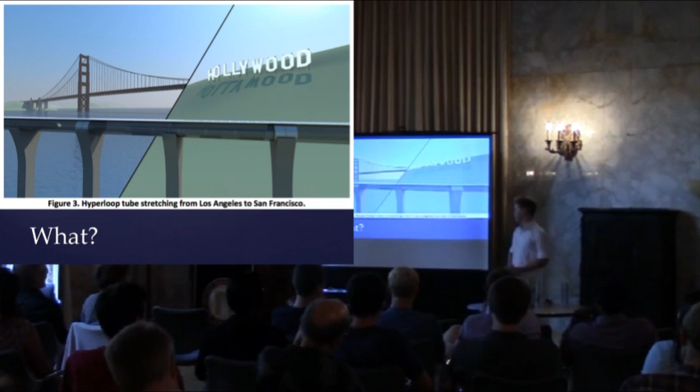Scientists have looked at it, and they haven't found any major problems with it, although it's been out for a few months now. However, it hasn't actually been prototyped at any scale. So I figured, this is what I should do in order to graduate. Okay, but what is it?

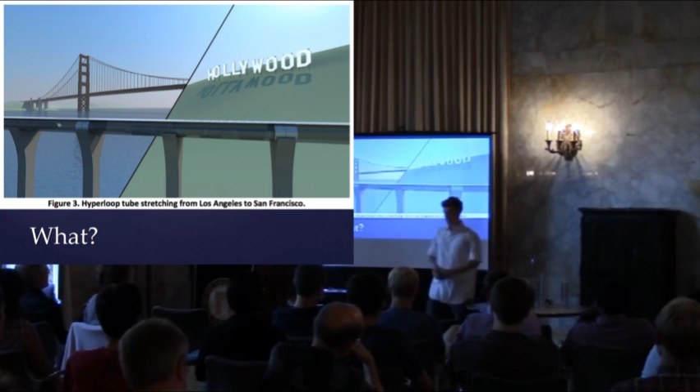In order to move very quickly, you have to be in a special environment, specifically an evacuated tube. Evacuated doesn't mean vacuum, that's very hard to do, but just low pressure, about 1/10,000th of atmospheric pressure, which is actually quite reasonable given industrial scale vacuum pumps. So you have 2 of these tubes traveling back and forth that have low pressure. Low pressure means low air resistance, and you can travel quickly and efficiently.

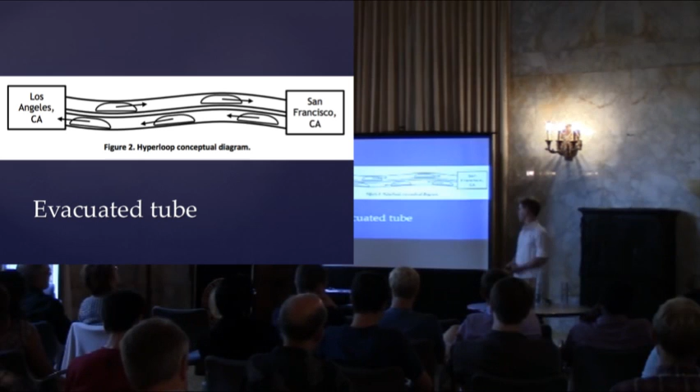One of the interesting things is that those lozenge-shaped capsules don't actually power themselves. They coast almost all the way, which is quite unusual for a form of transportation. So they're going to be coasting at between 300 and 700 miles per hour. How did they get going that fast in the first place? Well, you use what's called a linear induction motor, or that's what Elon Musk proposes. I expanded the definition to be any form of electromagnetic launch.

It seems kind of arcane, but you've probably experienced this if you've ever been on an industrial-grade minecart or on a roller coaster. The same kind of technology propels them. And these have been proven to work at the high energies required for the Hyperloop. So, this thing accelerates you, you go winging along, you're moving fine. What keeps you from crashing into the bottom?

Elon Musk points out in his white paper, wheels don't work at that kind of speed. They simply evaporate, burn up, and are very inefficient. So how do you keep yourself from impacting the bottom? He suggests something called an air bearing. Basically, you take 2 sheets of material with a very, very thin gap between them, and you pump high-pressure air in that gap. That creates an extremely slippery and remarkably stiff film of air that allows you to coast at very, very

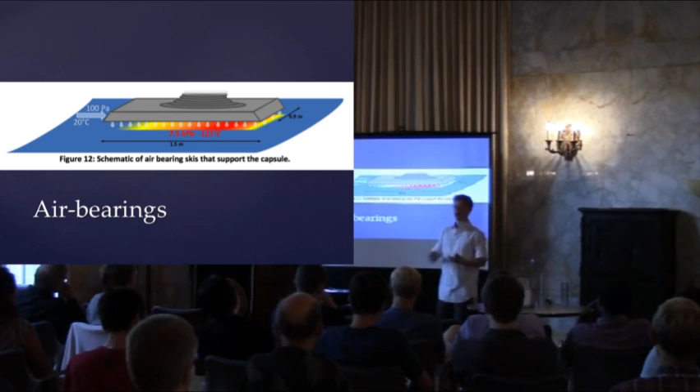high speeds. Again, it seems like a strange technology, but you've experienced this if you've played on an air hockey table. Flat sheet of plastic, a lot of small holes releasing a small amount of air. When your puck goes over it, it traps some of that air and creates a little film under it. Same principle that makes hovercrafts work. So here we are, moving very fast on a slippery sheet of air. Seems all well and dandy. But then you encounter the Kantrowitz limit, which we all know and love.

Right. You can think of it as the syringe effect. If you close off the end of the syringe and you try to move it really fast, you're going to encounter a lot of problems. Even if you evacuated a 350-mile-long tube to 1/10,000th of atmospheric pressure, and you're trying to wing a capsule through it at high speeds, and there's a very small gap between the outside of the capsule and the inside of the tube, you're going to end up building up a huge amount of pressure in front of you, and that's going to slow you down. It's going to be very inefficient.

So, one of Elon Musk's strategies was to basically drill a hole in the head of the syringe, allow some of the air in front of the capsule to actually pass through to the back and reduce that high pressure bubble in front of you. That allows you to go fast.

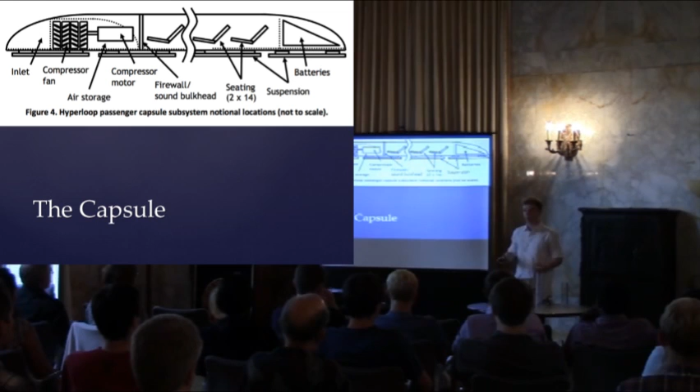So what does our capsule end up looking like? You end up having a large electric motor powering a compressor. The compressor takes air into the front, spits it out the bottom for air bearings, and out the back to overcome the Kantrowitz limit. Elon Musk proposes having several of these capsules traveling maybe every 2 minutes or so that carry about, 2 times 14 is 28 people. It'd be about 100 feet long, similar to an airplane, and you'd be in a nice reclining position. I don't think any beverages would be served.

So it seems like this is efficient and it's very fast. It's actually quite a good deal when it comes to transportation. But it's more than just a technical reason why. It's not just about saving money and energy. It's about the kind of technical prowess that we expect from California. And Elon Musk actually spells this out very clearly in his white paper.

He says, when the California high-speed rail was approved, he actually puts the quotes in there, so you can tell, I was quite disappointed, as I know many others were as well. How could it be that the home of Silicon Valley and JPL, doing incredible things like indexing all the world's knowledge and putting rovers on Mars, would build a bullet train that's one of the most expensive per mile and one of the slowest in the world? That's the current proposal for high-speed rail.

Costs about $68 billion. Will get you the same distance in about 2 hours for a ticket that costs over $100. The Hyperloop gets you there in 35 minutes. The ticket cost would be about $20, and it only costs $6 to $10 billion to create. People look at that number and say, oh, well, all major projects end up going over budget. If he goes over budget by twofold, he'll still come in $50 billion under high-speed rail.

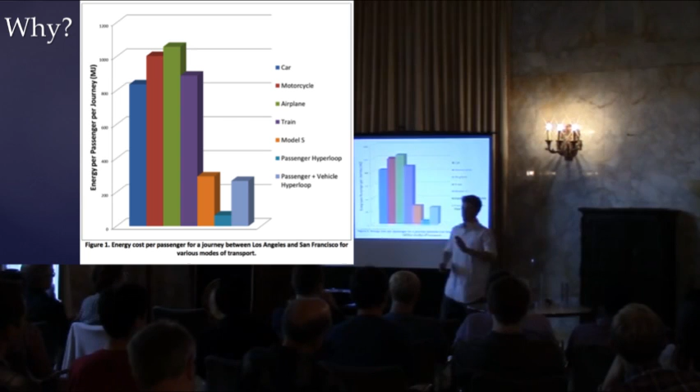So, we figured out why we want to do this. Now we get to the big question. How? It's not as easy as it seems. So let's go through the 4 things that make a Hyperloop a Hyperloop. An evacuated tube to travel in, electromagnetic launch to get you going, air bearings to keep you going, and our friendly Kantrowitz limit.

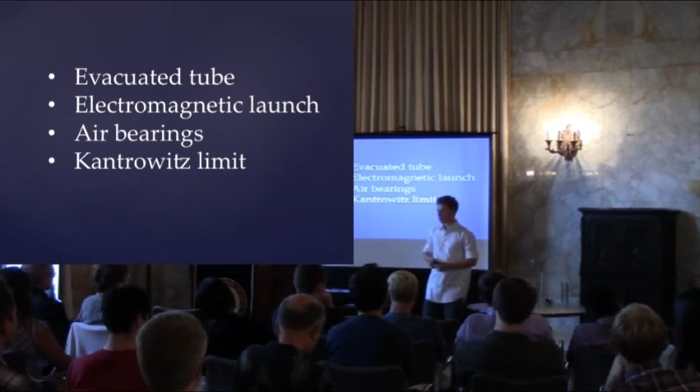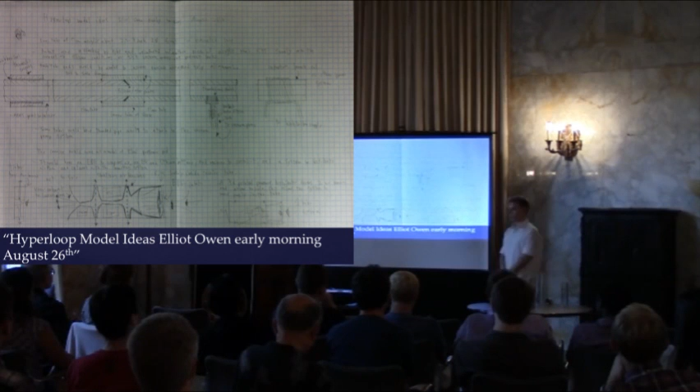So the first thing we come to is an evacuated tube. How do you get that kind of system? Well, Elliot at 2 a.m. thought it'd be great to have acrylic tubes. Acrylic's a type of plastic that's see-through, so you actually see the capsule moving. That'd be nice, looks more impressive. And you have little sleeves connecting them. So basically you have 2 tubes end-to-end with a sleeve over it, and that'll somehow create a seal. Didn't have that worked out at that point.

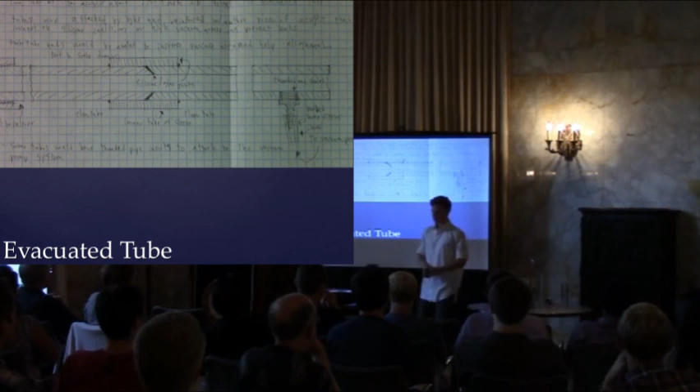I'm going to evacuate it by attaching a hose barb. It'll connect to a pipe. It'll connect to Mr. Ruzin's vacuum pump. Seemed like a great deal. I'd just be done. Well, I went through some evolutions. I realized I'd have to be able to take it apart and reassemble it and put it in my car. So it had to be modular, which means it could come in chunks, like Lego.

So I ended up with this system of alternating permanent and temporary connections. You have a small tube, permanently connected to a sleeve, that's then temporarily connected to the end of the next tube. So with that kind of premise, I could easily make this arbitrarily long, without much difficulty, and still fit it in my car. Also, I moved the nozzle to the end, and it ended up being much more convenient than drilling into a smooth piece of acrylic.

This is one of the first tests that I actually did. Here's Mr. Ruzin's vacuum pump, and here is a 6-foot length of acrylic. It's about 2 3/4 inches in diameter. The most important part of this picture are those 3 white rings you see on either end. Those are single strips of Teflon tape. It's a very thin and slippery material commonly used to seal threads in your plumbing or in the robotics pneumatics. So that actually creates enough of a seal and stops it from leaking too badly.

But with this setup, I can only get down to about 1/6 of an atmosphere, or 1/10 on a good day, which is still a few orders of magnitude off from where I want to be, or at least where Elon Musk told me I should be. So, enter the FGVP. I found a friend, Mr. Lunday, who works in automation, so he works with vacuums frequently, and he loaned me the FGVP, which is the fancy German vacuum pump.

So with the fancy German vacuum pump, I could actually reach higher pressures, or rather lower pressures, and go down to about 1/15 of atmospheric pressure. I connected the 2 because it ended up being kind of slow, and I could use Mr. Ruzin's faster one to just get there faster. But this wasn't quite easy. There were a lot of struggles along the way.

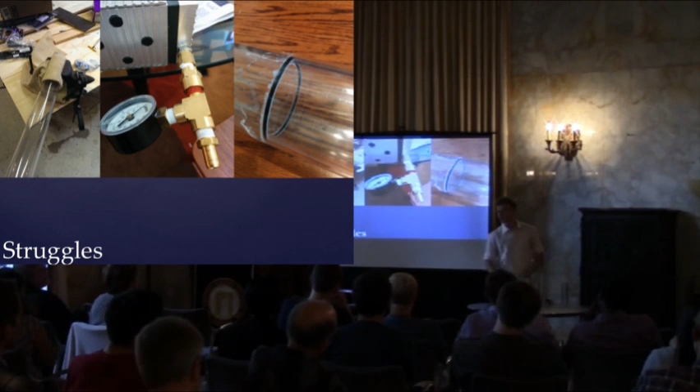At one point, I thought I could probably ditch the Teflon tape for a better solution. This is an O-ring rubber that managed to fit perfectly in between the two tubes. However, when TAP Plastics cuts your tubes for you, they don't do it perfectly perpendicular, it's at an angle. If you try to seal something at an angle, it's just going to leak all over the place. So it ended up not working, and I stuck to the Teflon. In the end, after much difficulty, I had an 18.5 foot long tube that was entirely connected and I could depressurize. So, that took a while to get to.

And then we get to electromagnetic launch. At this point, at like 3 a.m., I was totally on fire.

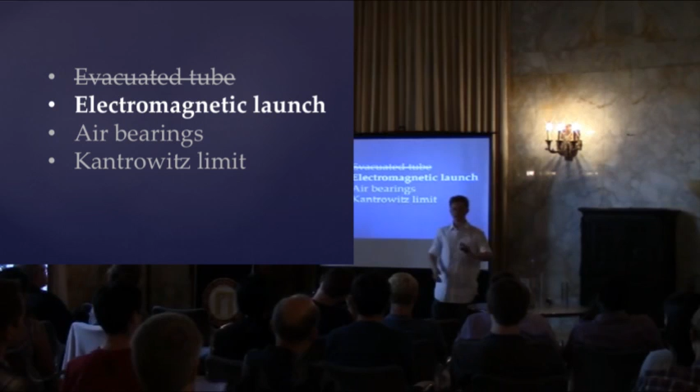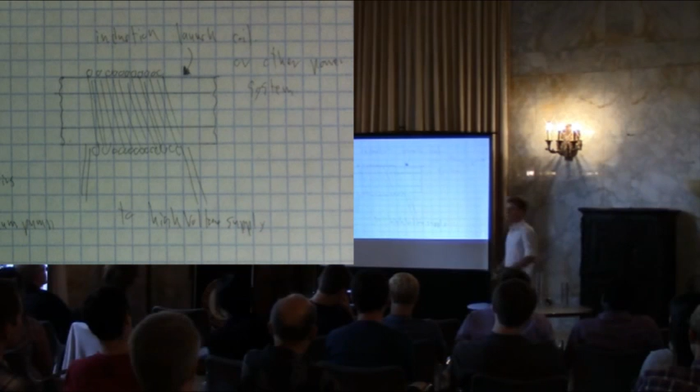I had all these great ideas. I was going to use a coil, right? It kind of works like that. I had no idea what was going on. So I ended up doing some more research, and I found that what I was really talking about was an induction coil gun. So, here you see a nice picture prepared by someone else.

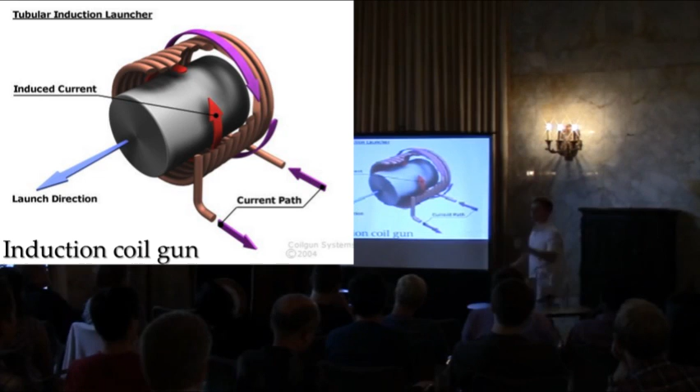You have a coil of copper wire, and you run alternating current through it. That current induces a current in the projectile. Induces is a word that physicists say when they really mean magically creates. So, that current magically creates another one, and naturally the projectile goes winging out that way. It seemed really easy. Obviously, this is bulletproof. Turns out, I ended up with a fail gun.

Not a fail gun. So, there was my coil, 10 wraps of 10 gauge wire. It looks kind of similar to what they had. I put a piece of aluminum projectile in it, plugged it into the wall, and the lights went off. Actually I blew a breaker, a 15 amp fuse on the back of the house. So I had to go out, reset that, much to my chagrin. And eventually I realized, okay, this is just going to keep happening.

So I bought a giant resistor. And that giant resistor is actually like 15 inches long. You work with resistors, they're normally tiny. That limits the current to about 8 amps. Plug that into the wall, no lights turned off, but the thing didn't move. And the resistor started getting very, very hot. It turned out it's also a heater.

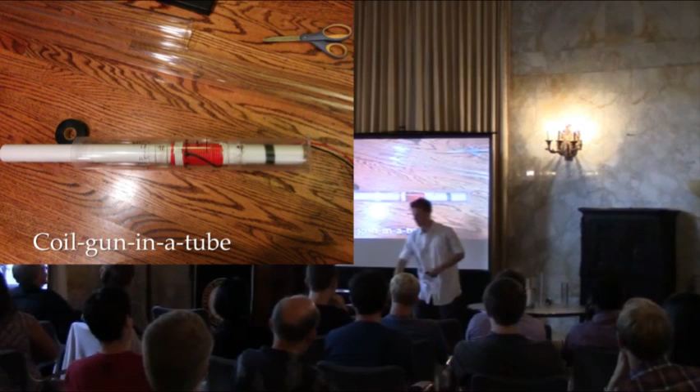But again, there were a lot of difficulties. I had to center the coil gun. This thing actually shoots an aluminum ring into the back of the capsule. When I told Dr. Character, he said Rube Goldberg wanted his ideas back. So it is kind of strange. I have it centered with these little acrylic spacers, but when you move the projectile another inch away from the coil, the power goes way down. So I ended up moving that.

I also had to get the wires out of the back of the tube while maintaining a vacuum. That required a lot of improvisation and silicone sealant, but I eventually got that to work.

And then here's a wasp. No, I did not make it. I encountered it though late at night after I was testing the coil. So 10:30, plug it to the wall, break another breaker, or rather just flip it. Go to the back of the house, back of the garage, take off the panel, and there's a wasp nest there. So this is not what I signed up for when I went to be doing science. So vegetarians, cover your ears. I did have to kill the wasp for science. So, sorry about that.

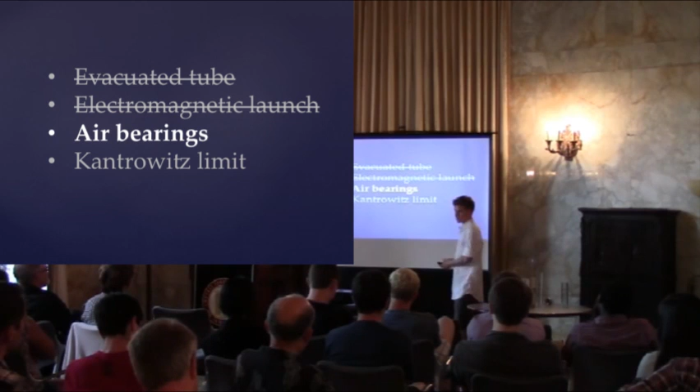And then there are the problems with air bearings, of actually making these things. I did some research. On the industrial scale, air bearings are made with micron tolerances. Extremely small distances, very high level of craftsmanship, stuff I didn't really have access to. So I had to figure that out. My first design was pretty cool. It was like crazy 3D printed internal structure to move the air around properly. Here's the fan, it spits out the side and the back, it's gonna be great.

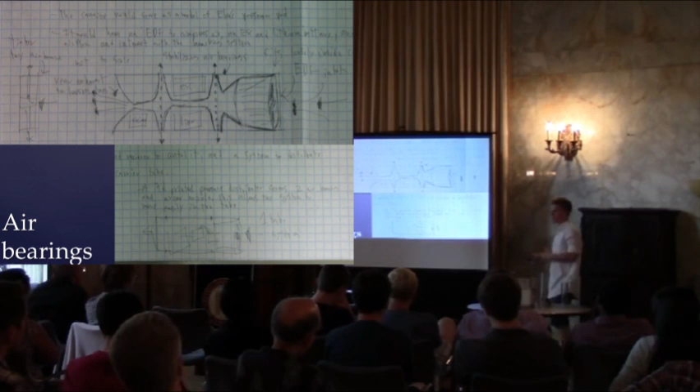Then I realized that if the entire capsule is going to be at the same kind of pressure, I can just drill holes in the outside and get the same exact effect without any fancy 3D printing. So here's my less enthusiastic one-tube system down here, where I just put the stuff in a tube and let it go.

Finding that tube was actually a real challenge. So here you see a motor connected to a controller. There's a big lithium battery on the back and a little throttle here. So it turns out that the inside of my Hyperloop is 2.5 inches. So I had a tube where the outside diameter was 2.5 inches.

And I thought, wow, gee, this is great. And they don't fit together. So that's also probably because acrylic has terrible tolerances. So then I thought, okay, I can get around that. So I want to size down. This is 2.25 inch, and it fits wonderfully.

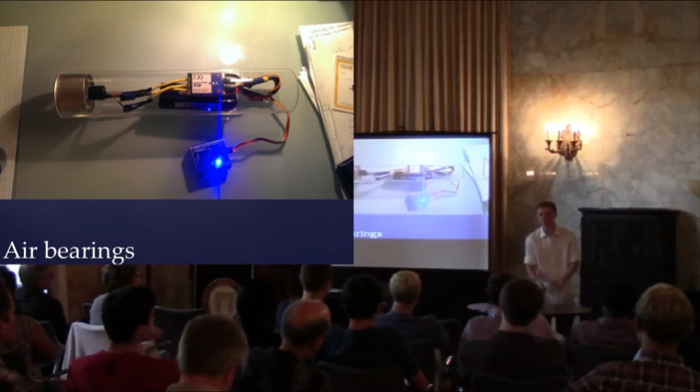However, my motor does not fit into it. So here I had a problem. One tube was too big, one tube was too small. I ended up searching online and found my Goldilocks tube, which was just right. So I then proceeded to drill a lot of small holes in it to allow the air to leak out the sides.

One thing that I realized in this demonstration is that when you have this big difference, there's a huge gap on top. If I simply had my holes and none of those two little white rings I'll talk to you about in a second, all the air would leak out the top, and it wouldn't form any pressure on the bottom, and it wouldn't actually separate off from the bottom of the tube.

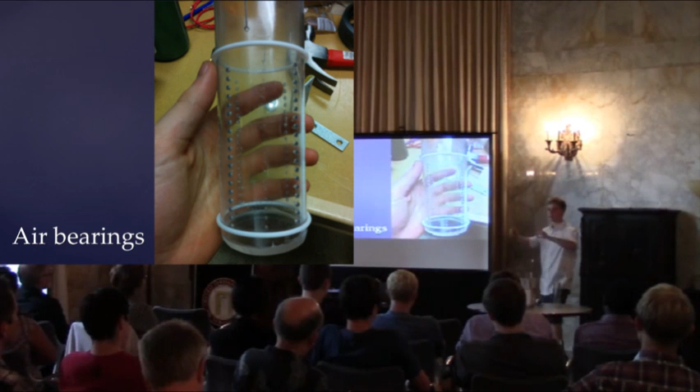So these are Teflon O-rings. It's a very slippery plastic, but more important, it's the right size to center the capsule, so that air is actually squeezed around these tiny little gaps, shown right here, instead of just pushed out randomly. So in my great idea, the air comes in, it gets squeezed out the sides, small holes, and spits out over the back, and that should make air bearings.

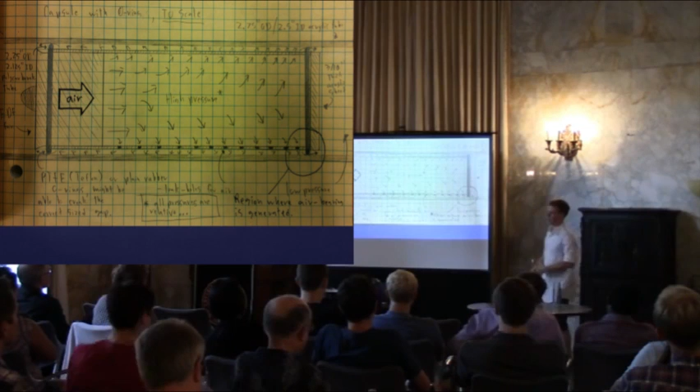Worked for a while until I ran into some more tolerance problems. It turns out that the acrylic tubes that I bought about 2 months later were smaller on the inside than the ones I bought a few months earlier. So the Teflon O-rings do not actually work anymore, so I had to go to plan B.

This is 3 layers of polyethylene tape with 1 layer of Teflon tape on the outside. Just 3 layers, not 4, 5 is right out. 3 layers is what you want. And that ended up working with a little bit smaller. Even that wasn't particularly easy. I had to drill a lot of small holes.

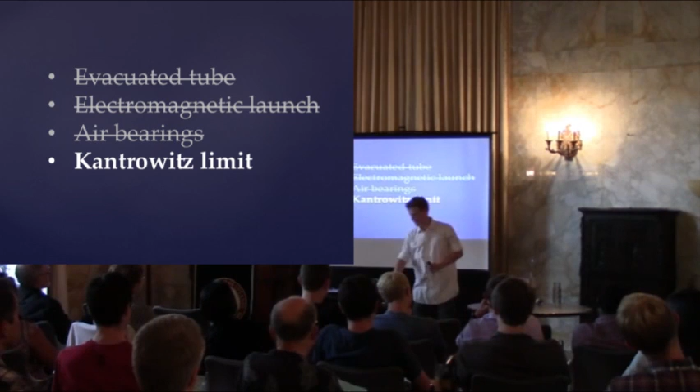What you may have noticed is that the capsule started moving before it was hit by the coil gun, and then continued to accelerate. That's because on a good day, the coil gun might deliver 1 joule of energy, and the motor will deliver 150 every second. So at this scale, the compressor fan can definitely power it, although it wouldn't actually work if you're trying to do it at a large scale.

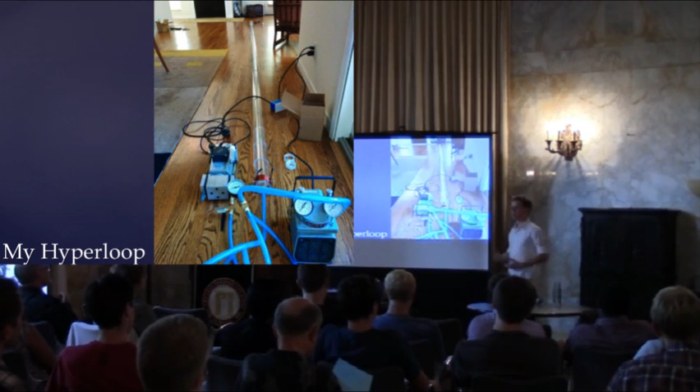But you know, what kind of stuff does apply? The lessons about material tolerances. If you want to make a tube that's 350 miles long, and you want to have air bearings in it, you're going to have to make sure that the entire thing is very uniform, which can be very expensive.

So I was using extruded acrylic. They literally melt a bunch of plastic and squeeze it out of a ring-shaped hole. It's like Play-Doh. And it kind of melts and solidifies roughly the right shape. That's really cheap to do, but you get bad tolerances. If you wanted to cast it in a giant mold, you'd get better tolerances, but it would be much more expensive.

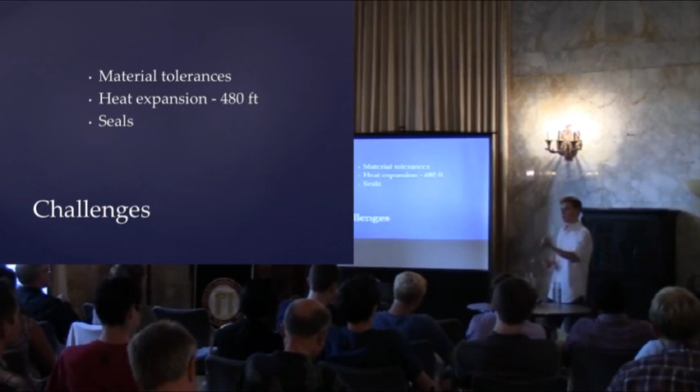Turns out, if you take 350 miles of steel and you heat it up 20 degrees Celsius, that's like a big swing from day to night in the Central Valley, it's going to get 480 feet longer. So you're walking to Caltrain, and some of your Caltrain station's 2 blocks that way because the rail is there.

So obviously there is a way around this. The rails actually have little gaps in them that expand on a hot day. That's actually where you get the clicking noise as you go over the tracks. Bridges will have similar expansion joints. But here's the thing. You can't have little gaps in your tube, otherwise your vacuum is not going to have a seal anymore. Also, if your air bearing hits that little gap, maybe it'll lose pressure and then it'll leak. So that could be a huge problem.

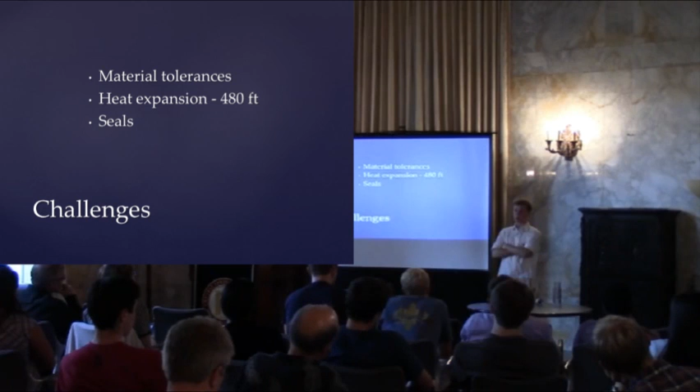Holding good tolerances over a long distance while maintaining a seal doesn't have much of a precedent. The thing that comes close is oil pipelines. They do cross continents, and they do obviously heat up and cool down, and they do actually maintain a seal and hold this dangerous liquid. However, the tolerances on the inside of the pipe don't really matter. Oil doesn't care if it goes over something that varies by a few hundredths of an inch, as long as it's slippery. So that's what I think could be the biggest challenge that people actually making this could fix.